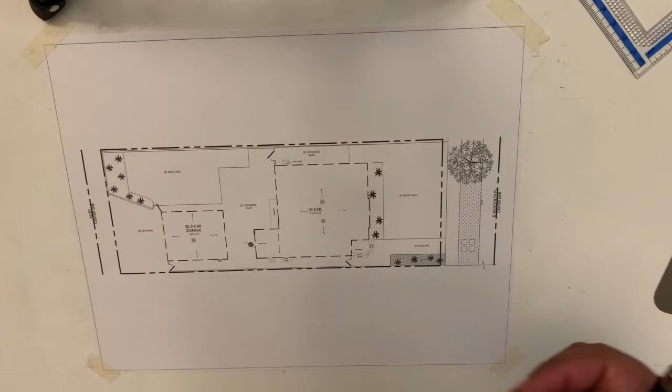Okay, so in this video, I'm going to show you how to do a roof. Now, I've already done the site plan, and I already have the hidden line. I kind of exaggerated the line work, made them a little bigger than I would normally, just so you could see it in the video of what's needed in a site plan.

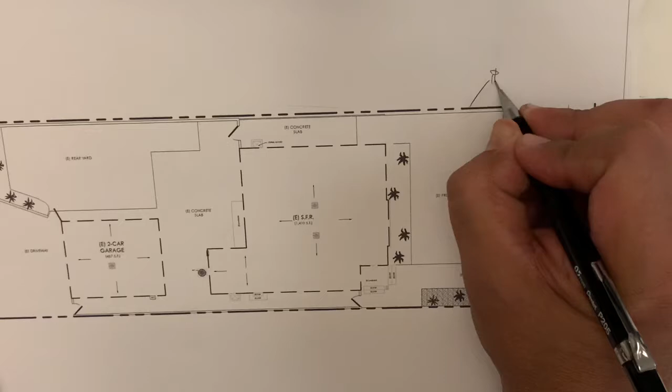So this is the property line, just put PL for short. And so you see a long dash, two dashes, and then a long dash, and that pattern repeats. Now, this is the footprint of the first floor that's in a hidden line. And so it's just dash, dash, dash, dash, dash, dash, space, dash, space. Again, long dash, space, small dash, space, small dash, space, long dash. And that pattern repeats.

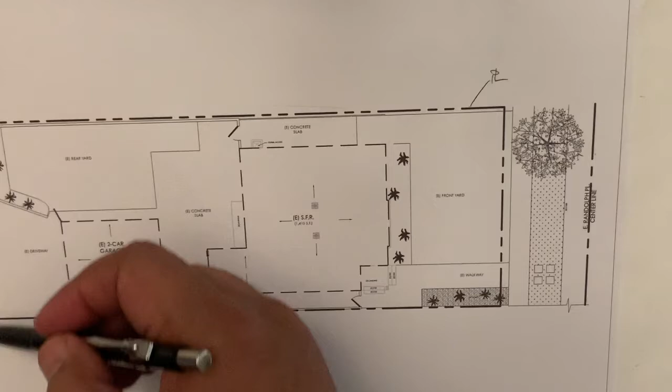I show a center line right here, and this is the alley, this is the street. You should label them as well. I show a sidewalk, I show that grassy area that is in some neighborhoods, that's in between the street and the sidewalk. And then here is the front lawn, and here is the house.

So this video is going to be for roof plans, and I'm going to show you how to do roof plans.

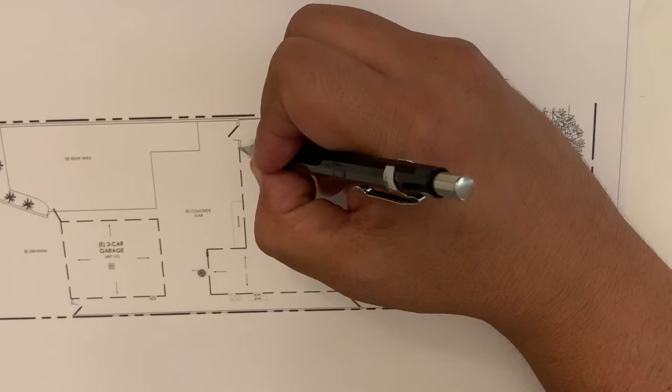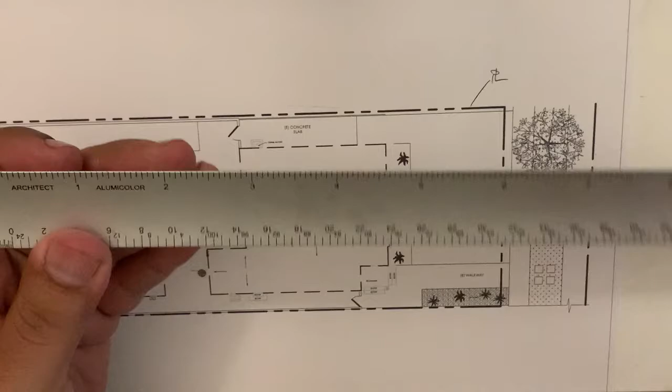Typically I would offset this line 18 inches, but for the sake of this video, I'm going to go ahead and do 24 inches. And because this is at a small scale, this is at 16th scale. And if you're wondering how to do 16th scale, well, this is the 16ths. For every dash you see, that's a foot. So what I'm going to do is I need to make this 2 feet and offset it 2 feet.

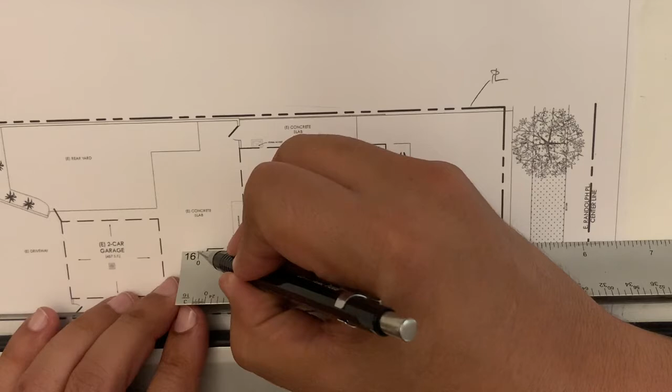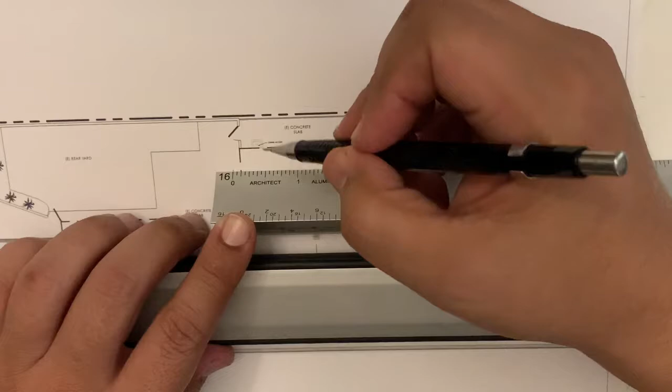So I'm going to take this scale, just going to go ahead and mark it 2 feet. Do that here as well. And notice how I am getting 2 reference points, just to make sure - there's that old rule, measure twice, cut once, similar to that. I'm going to go ahead and do that over here as well, and right here.

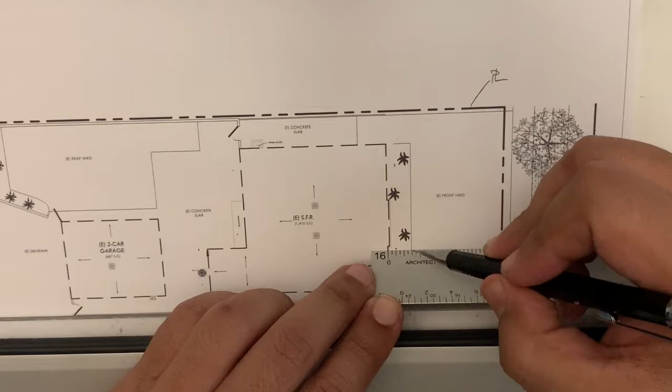And I would definitely recommend doing this on tracing paper. That way, if you mess up, you just tear another sheet.

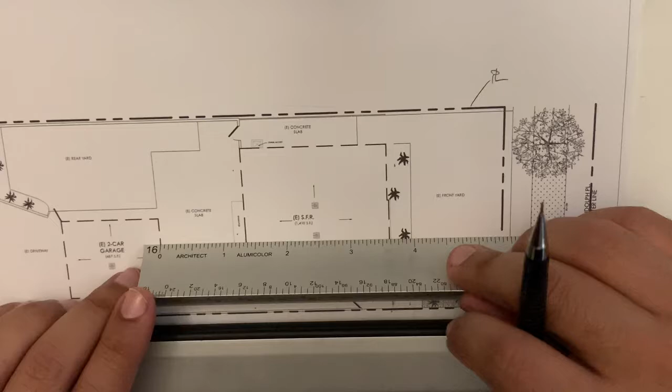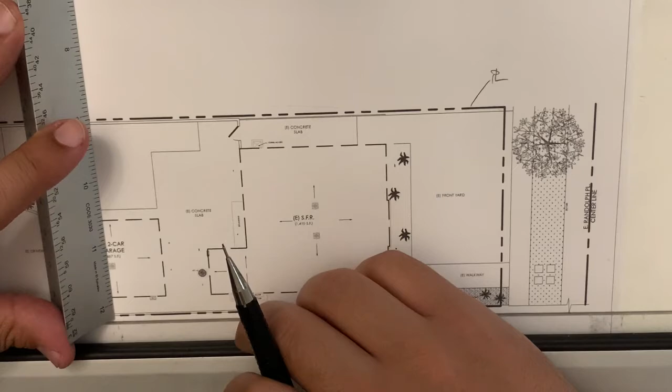All right, let's do that. And again, I'm just ticking off 2 feet on all sides. And I'm going to do the same over here. And there we go.

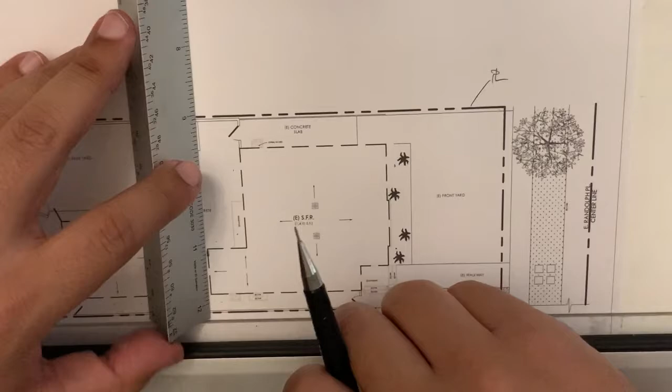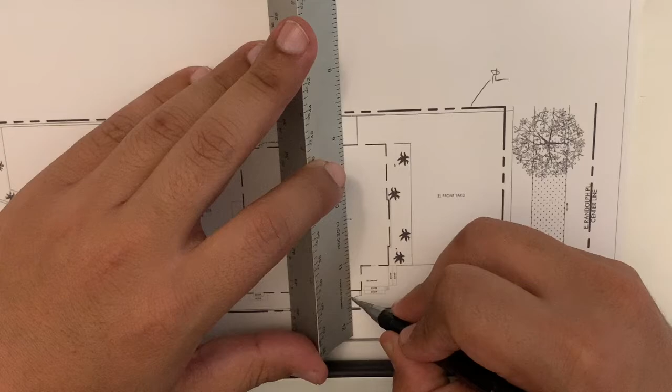And so this is going to be a porch, and I want that covered within the confines of the roof that I'm about to build. So I'm going to go ahead and make sure that happens.

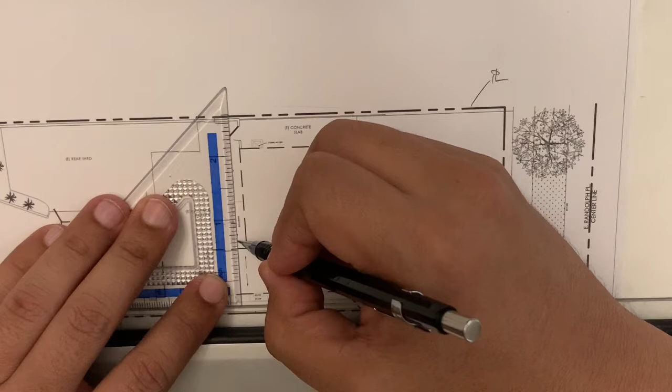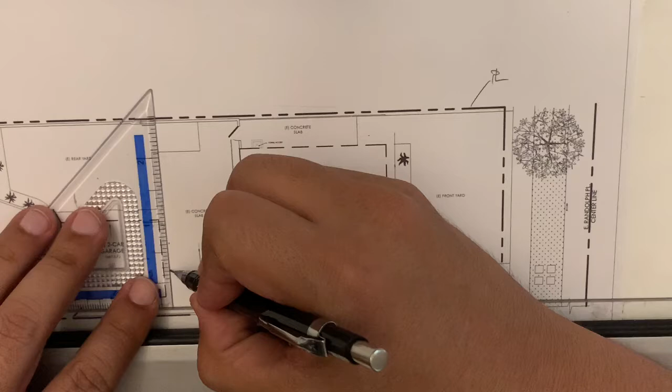All right, so now I'm ready to just lightly create the line work. And I'm using these smaller ones, these smaller triangles, just so you can see in the video. There we go.

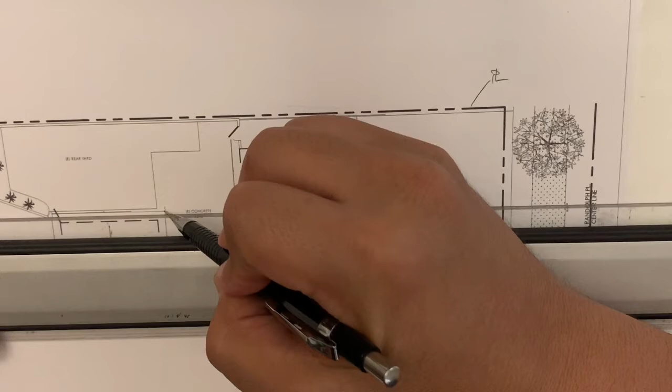And I'm going to do some cleanup afterwards, so again, go really light. And what I'm creating is the overhang. Most roofs have an overhang. Why do they have an overhang? Well, I want you to look that up. Why do buildings have overhangs? Why do houses have overhangs? I should be more clear about that.

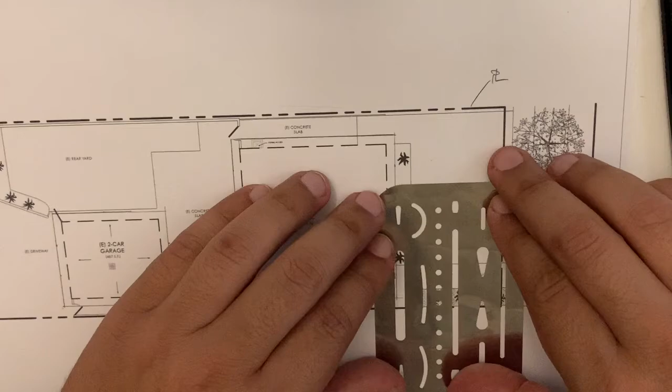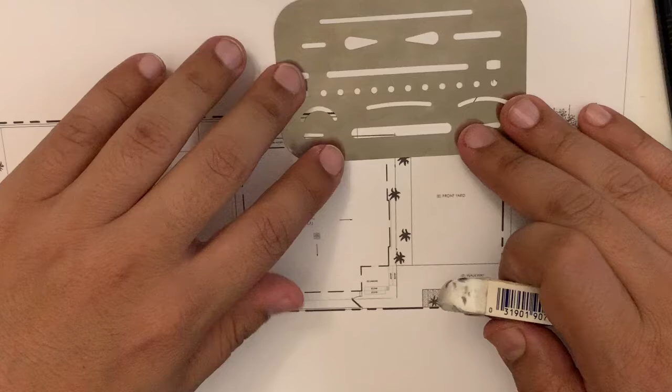Okay, and here. Now I'm going to go ahead and, my erasing shield, I'm going to take this part and this part, clean it up a little bit. Right? All right.

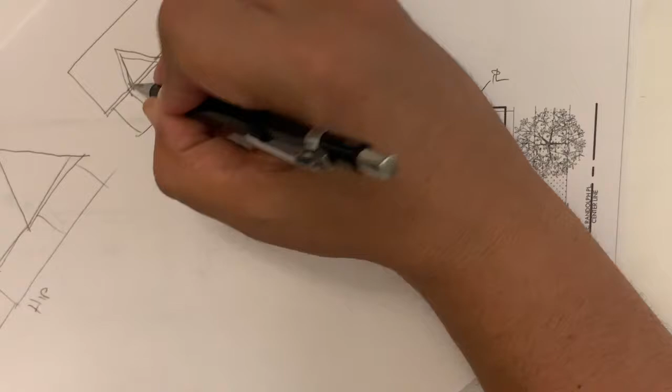So now I'm going to show you how - there's various roof types. I'm just going to show you hip and gable. Your gable roofs are more of your triangular ones, and you'll see a fascia like that. And if you were to look at this side of the house, it would look similar to like that, where this is more of an angle.

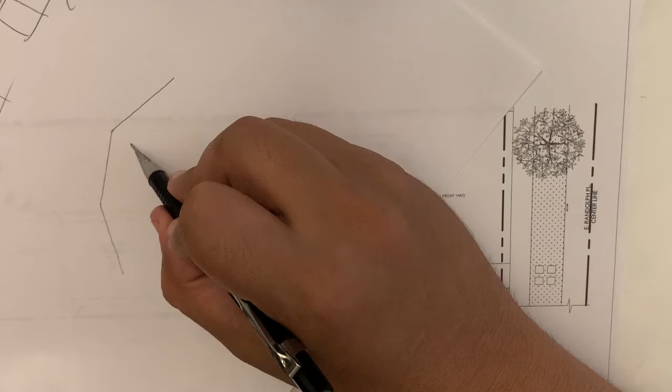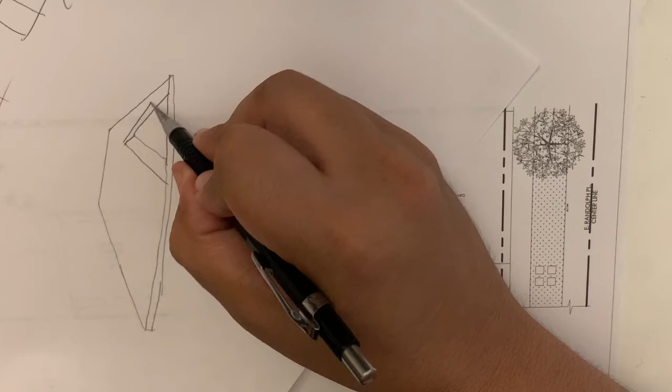If I was to draw this like this, this is the hip roof, and let's just say I wanted to go, and it would look something like this, where this is kind of slanted, everything's kind of slanted. And even if I was to do something like this - oops.

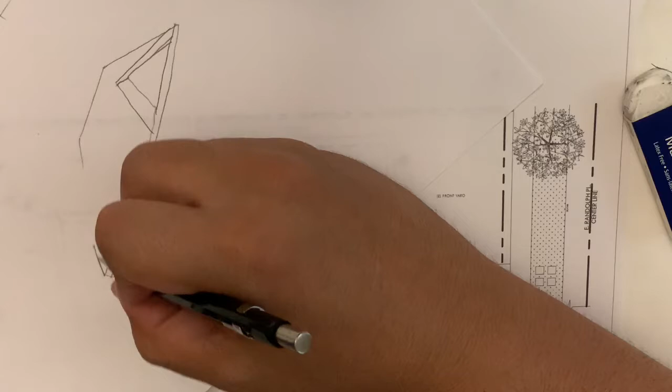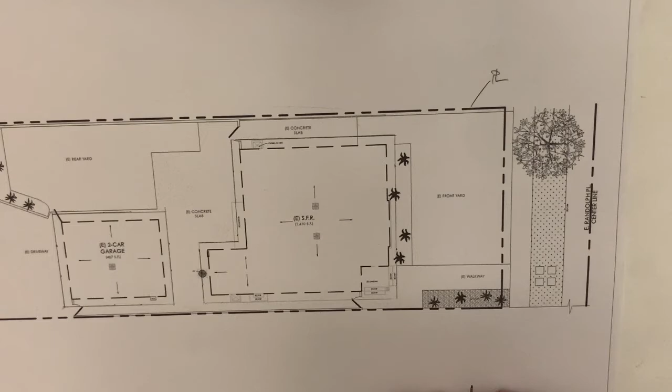I would definitely have to know the nature of the roof before I even actually start this. And so that's slanted down. And so that's hip and gable. And I'm going to show you how you can do both. So I have - I'm going to darken as I go.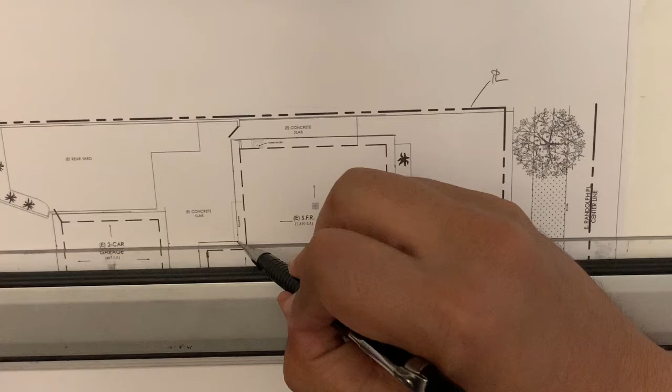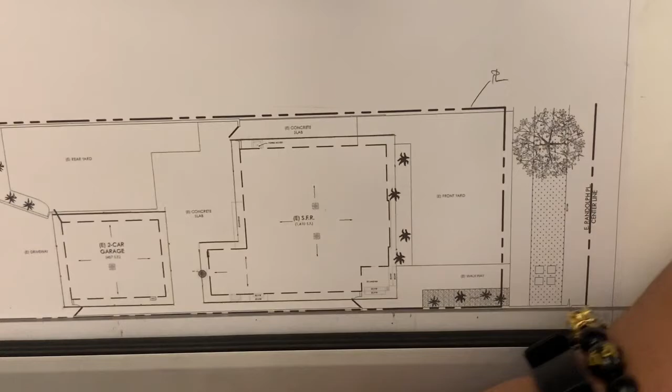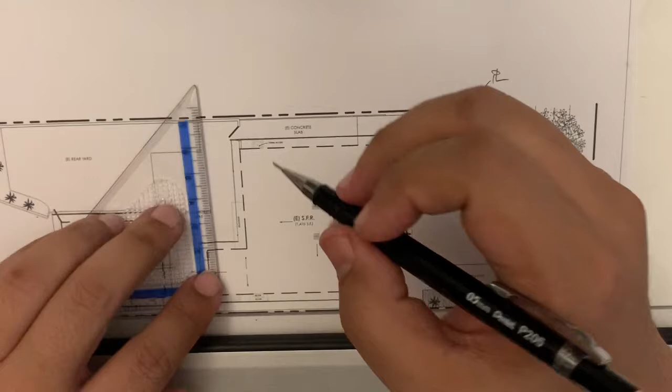And actually, I'm just going to get it real quick, it's bothering me. There we go. I'm just going to use my small 45. Now, I flipped it over on purpose because this has a beveled edge and it keeps sliding underneath this bar. So when I flip it over, this edge meets the straight edge perfectly, so it doesn't slide underneath and mess with the drawing. Now it takes some getting used to, but you get the idea.

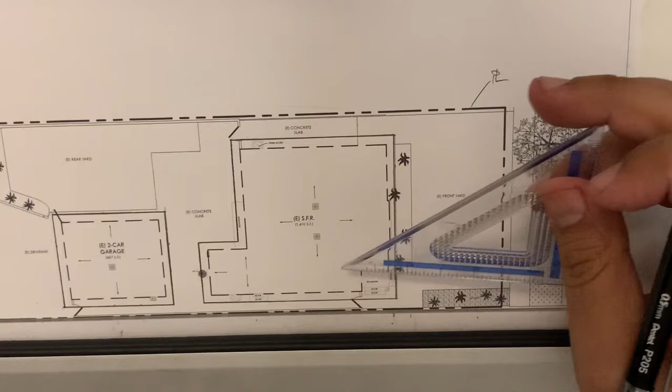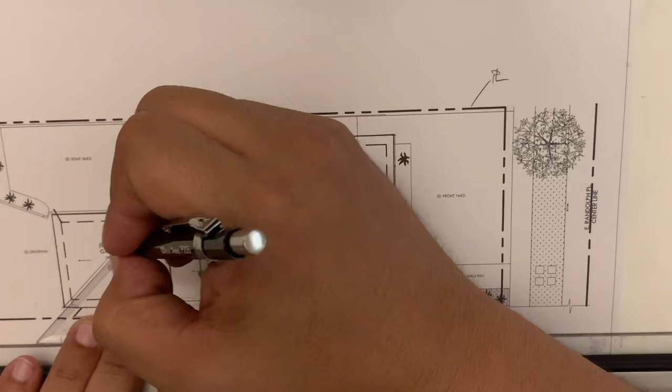So, how do we go about doing this? I'm going to show you exactly how I was taught. All the lines that I'm going to draw are 45 degrees, and I'm going to show you how they connect afterwards. So let's do 45, and again, go light. And I'm going to go over here, 45. And then I'm going to flip this and carefully do 45 and 45.

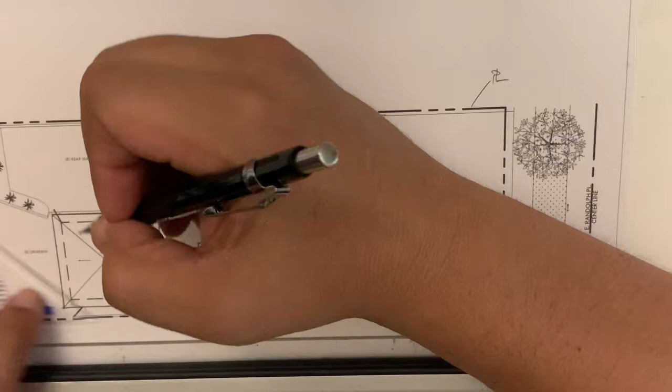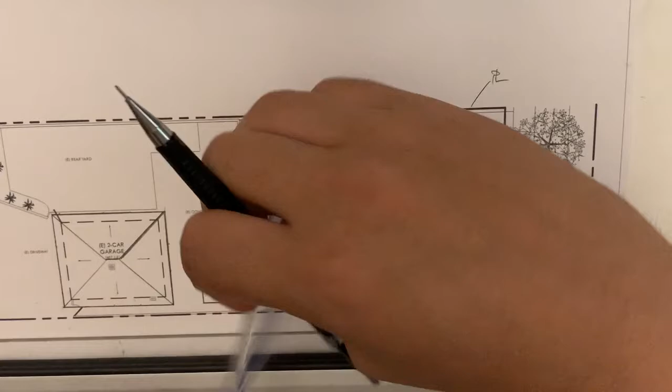And where these lines meet is the ridge. So all these slope in that way. I have the arrows indicating that it slopes down this way, this way, this way, and that way. So go ahead and darken that up. Let's darken this up. And that's it. This is how you do roofs.

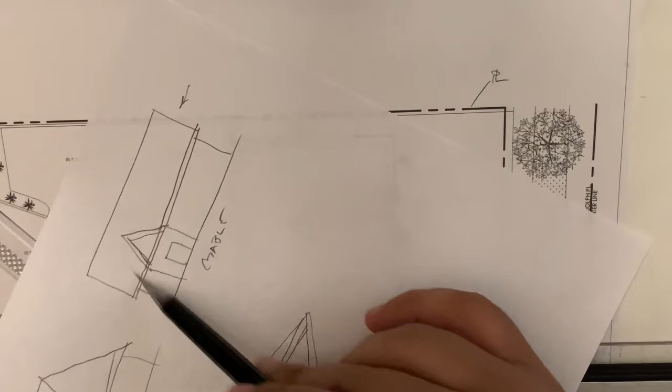Now, do they get a little more complicated? Yes, they do. And sometimes you have to really study them. Now, what about here? I could do a gable roof right here, the triangular one right here. I could totally do that. I could just put a straight line from the middle here, where this meets that roof, and then deal with that roof. Or I can make it a hip roof as well.

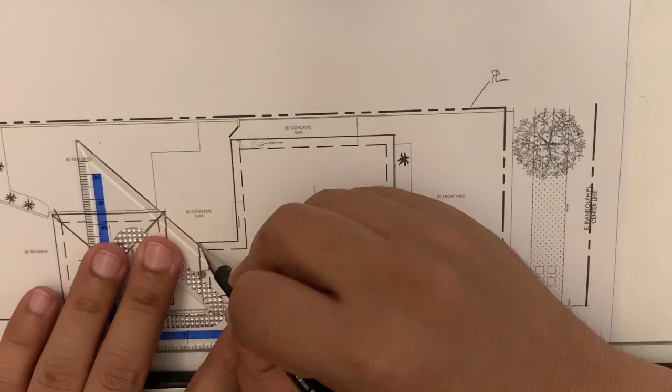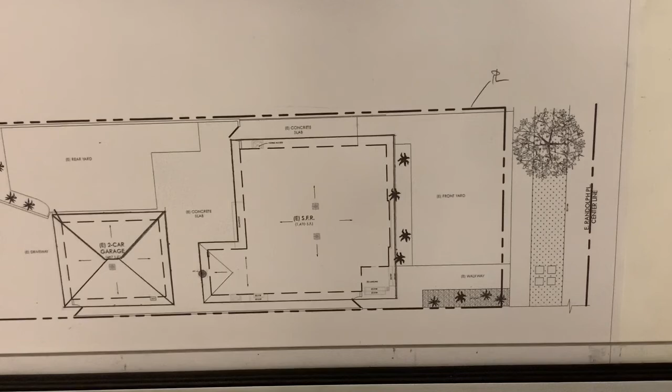Let's make it a hip roof. So again, 45. That's where it meets. And I'm just going to do a little bit of cleanup because that bothers me. And then we have this part right here that's supposed to match up. So I should be able to take this angular line and make a copy right here. And this line is the ridge of that roof.

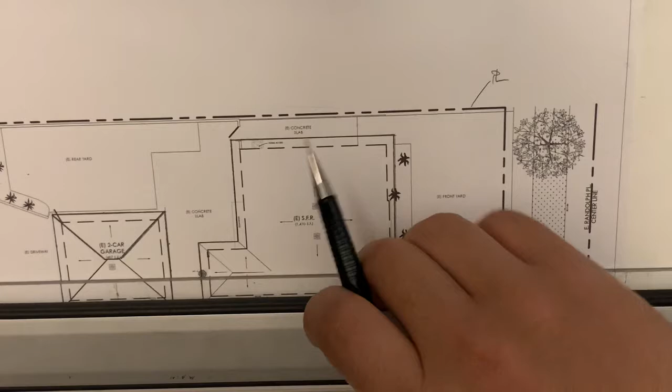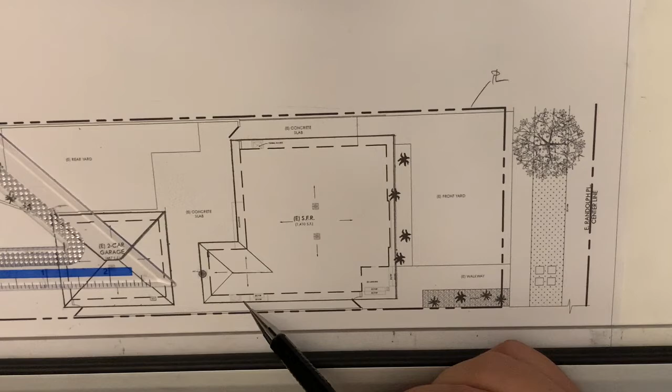So here's what I want to do. There we go. And you can see how the roof is forming. Do I need one over here? No, I don't, because this is going to go up. And how do I know that? Well, let's go. So here we go.

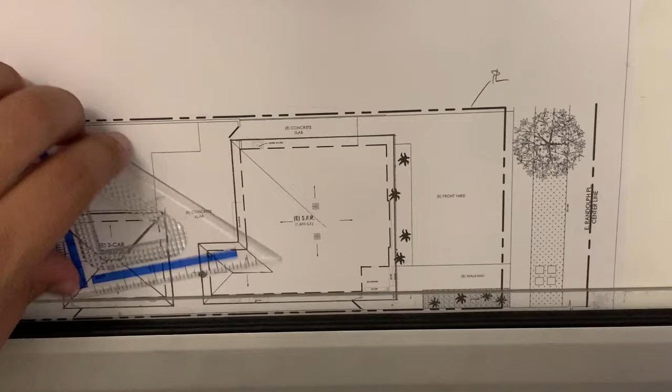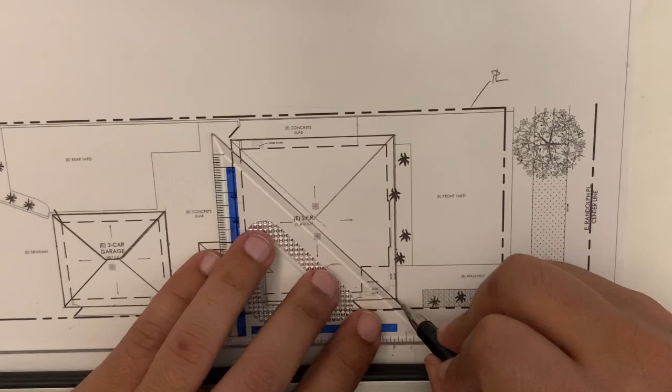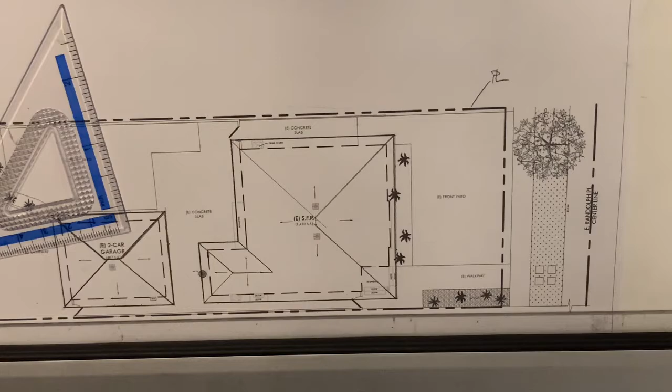And here we go. Let's flip this, this corner and in this corner. Okay, and now I know that from here to here, there's a ridge, tiny, tiny ridge. And I could take this intersection right here, let's see if I can zoom in, take this intersection and take that point and then just drop it down to here. It should match up. And it does.

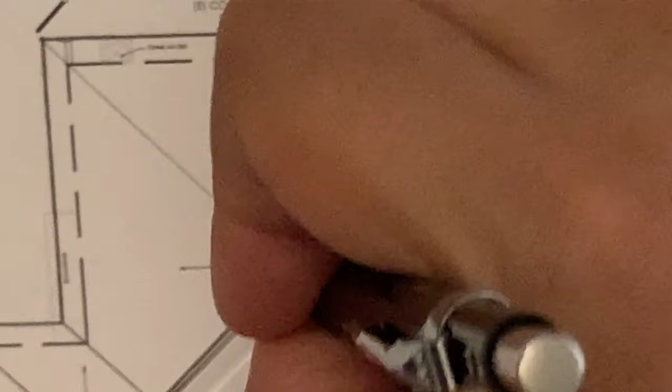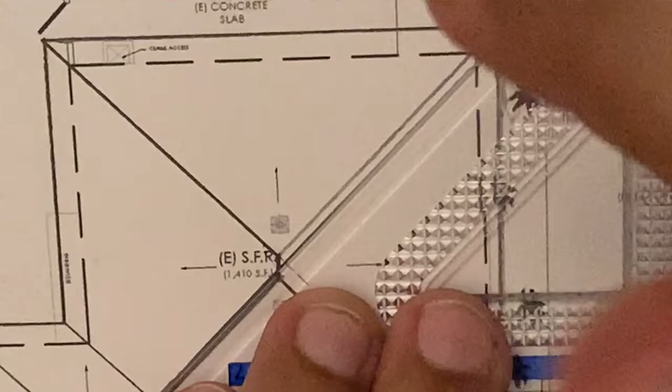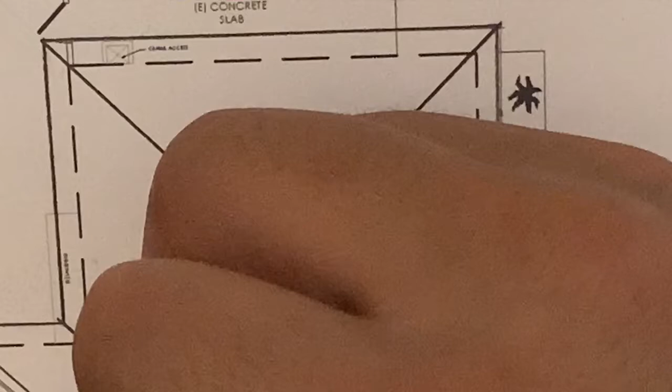There we go. So it matches up. Good to go. I just need to darken my roof. Let's add this. And let's go over here, darken this up. You're gonna make sure your line thicknesses are similar, it should all be the same. There we go. And voila, there's the roof.

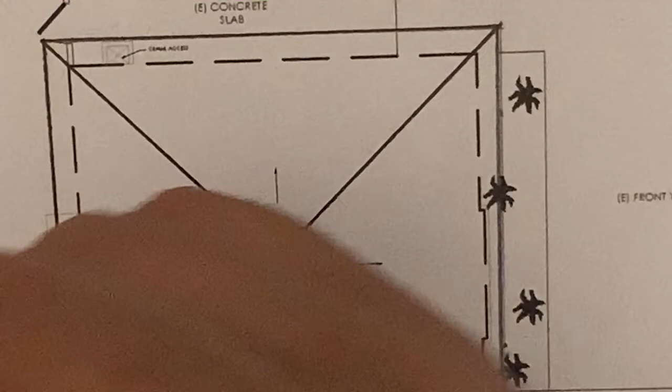Slopes down this way, this way, this way, this way. This is all one side here. Slopes down that way, and this is the garage, down that way, down that way, and down that way. Now, this outline right here, this hidden line, that's the footprint of your first floor.

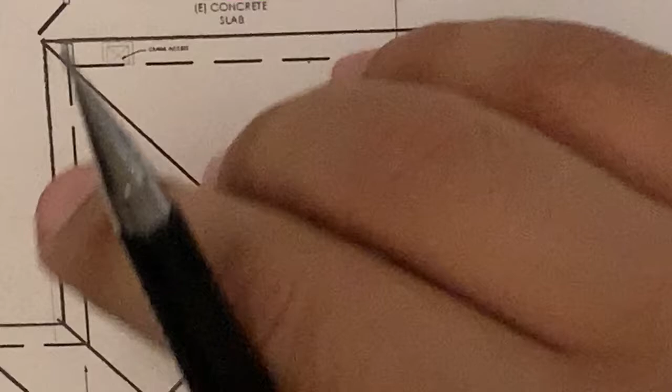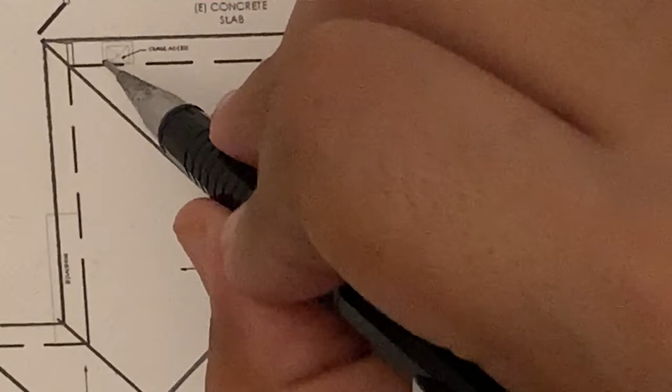Now, you might have to do the footprint of the second floor because you might have a little roof in other areas. So if this was the second floor, and let's just say the house came out to here on the first floor, well, then this wouldn't necessarily be the footprint of the first floor. So again, you're gonna have to think about this logically. How does it look going straight down? And that's pretty much it.

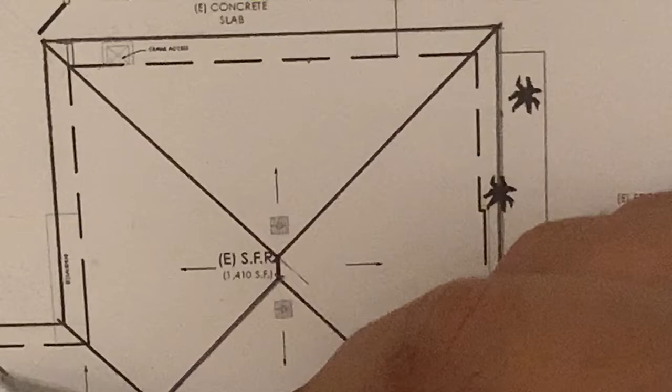Do you have to put the hidden line? You could just do the roof, and let's just say there's another roof, but this hidden line helps. So I would definitely lay down some tracing paper first with this on the site plan, and then tear off another piece of tracing paper and lay it down, and then start doing your roof. And then just put them together and trace it all together. And you're good to go. But that's it, that's how you do roofs. It's pretty, not too bad.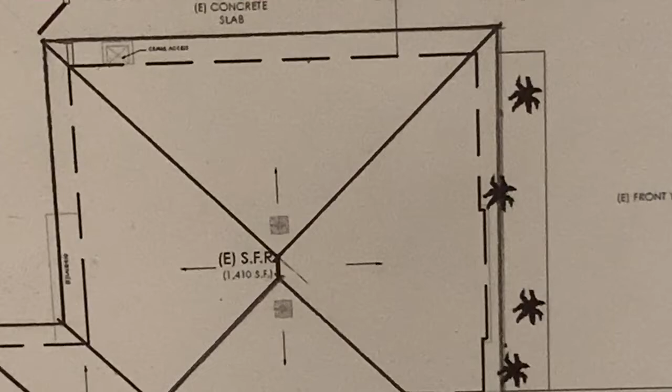All right, oh, and I just wanted to say real quick that if I was to make this a gable, I wouldn't use these lines. This line, this ridge right here, would just go straight to this line right here. Never mind that, that's an AC unit that I drew on a floor plan. I printed this out just so I could show you how to do roofs. Anyway, there you go.